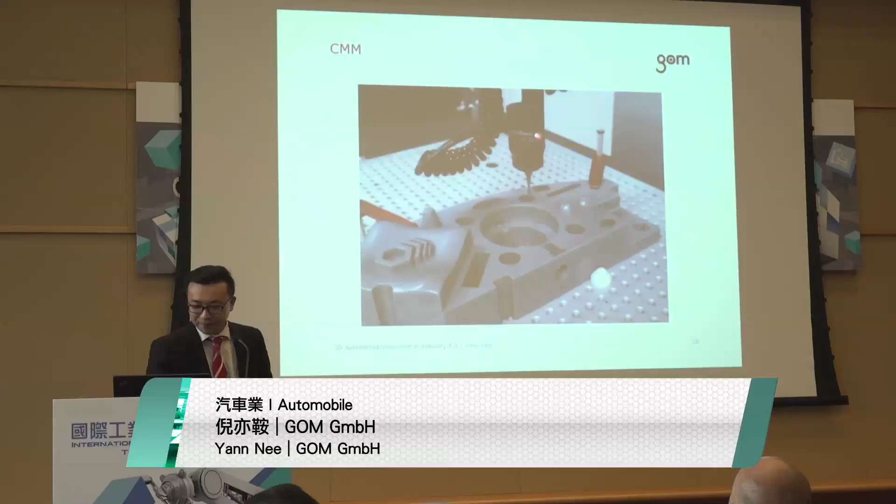Today we are going to talk more about 3D scanning, which is what our company is offering to the market. We call it the ATOS system. The ATOS system has been introduced since '95, and the speed we're talking about here is up to 16 million points per shot in 4 seconds flat.

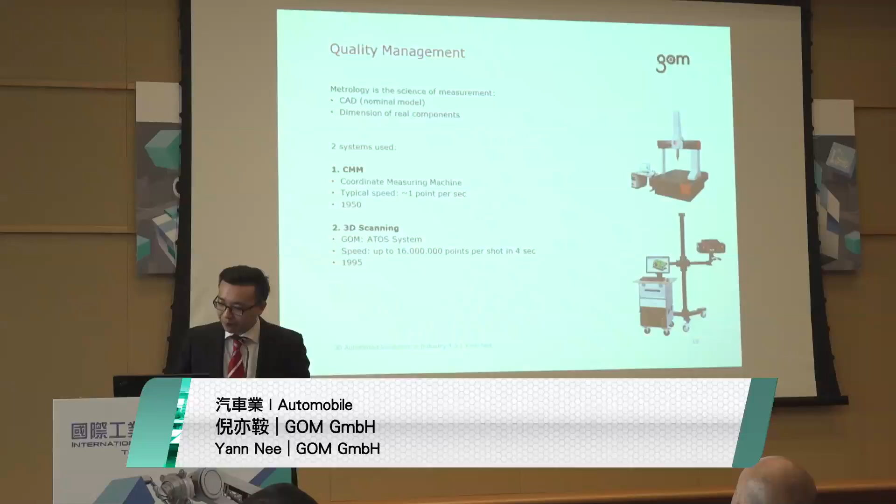Here is a short video where you can see at the design department, we talk about having a better looking car. Here you see designers taking a knife and shaping a clay model.

So after shaping that, here is one of our scanners. In the middle you have a projector, and on the left and on the right you have 2 cameras. So here you see projection of a certain pattern onto the clay model, and we record those patterns with the cameras.

Looks a little bit fancy, right?

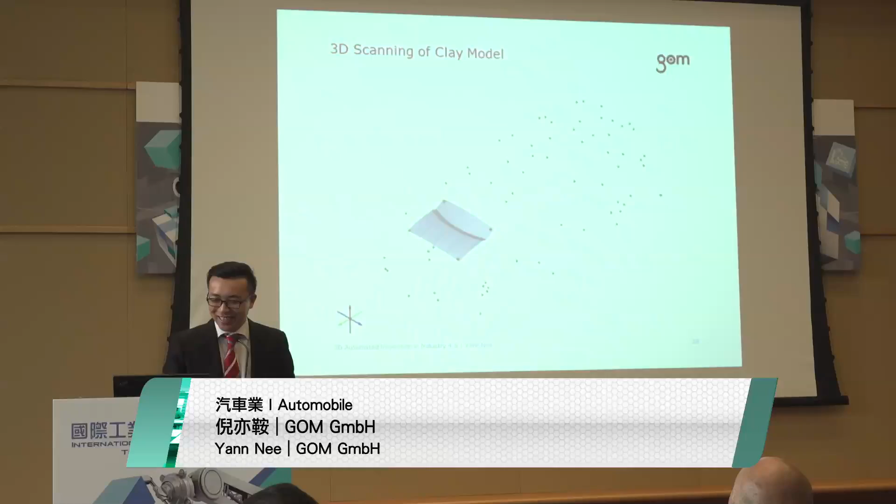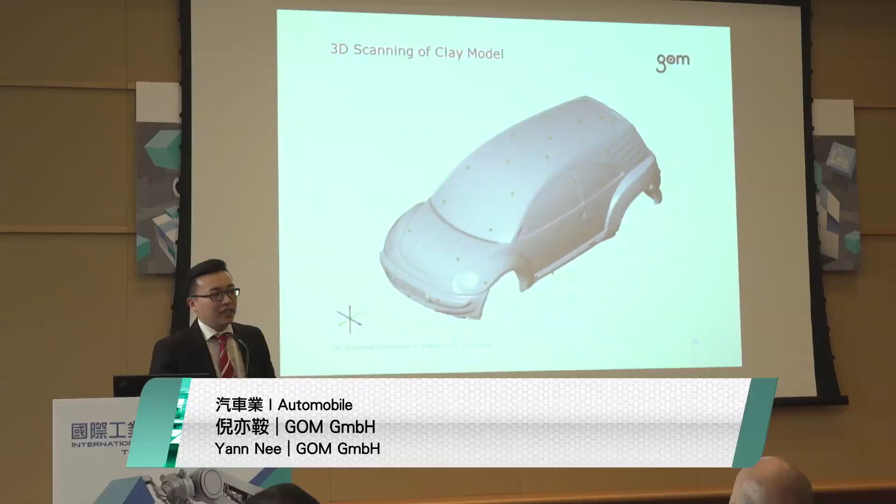So we are taking shots. Inside our software you see the real part that is digitized, and at the end you see the real part. So this is not the CAD model, this is the real part that has been fully digitized in our software.

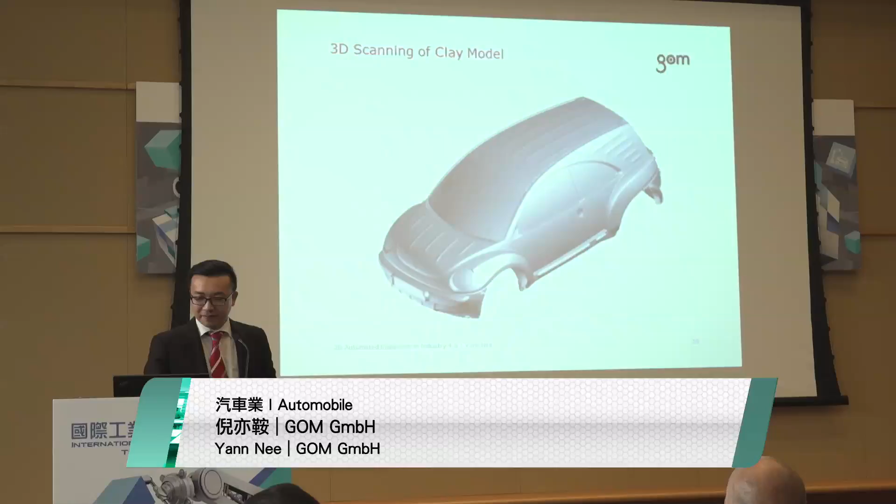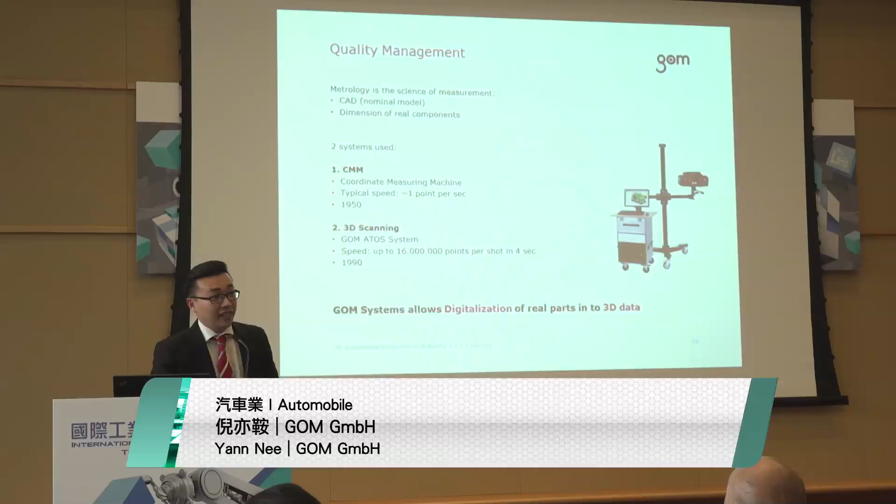So this is about digitalization. Now let's talk about big data in a smart factory, and we will put it in contrast to decentralized decision. What big data in a smart factory means is that at the top floor, you have people able to monitor thousands of parts inside the factories. A car has 1,000 parts.

You have so many cars in production, so we are talking about maybe millions of parts. Those systems will be able to optimize the sequences, optimizing the time to produce a car. At the top floor, it will be very easy to find the bottlenecks with all the software that we have. And it will be very easy to visualize and analyze problems and take immediate actions. And of course, all that data will be accessible at all times and everywhere.

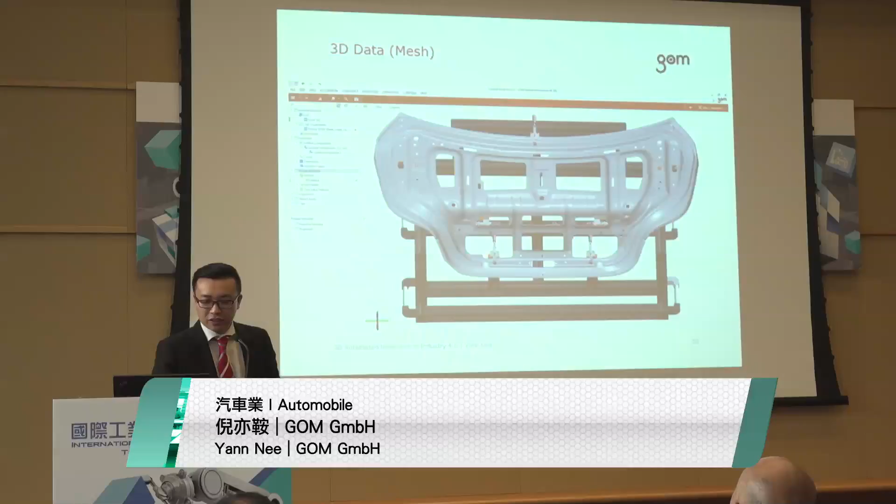So at GOM, we have just seen those 3D data. This is an example of a backdoor, a sheet metal backdoor that we have just digitized. This is the real part, and this is our nominal model, the CAD model.

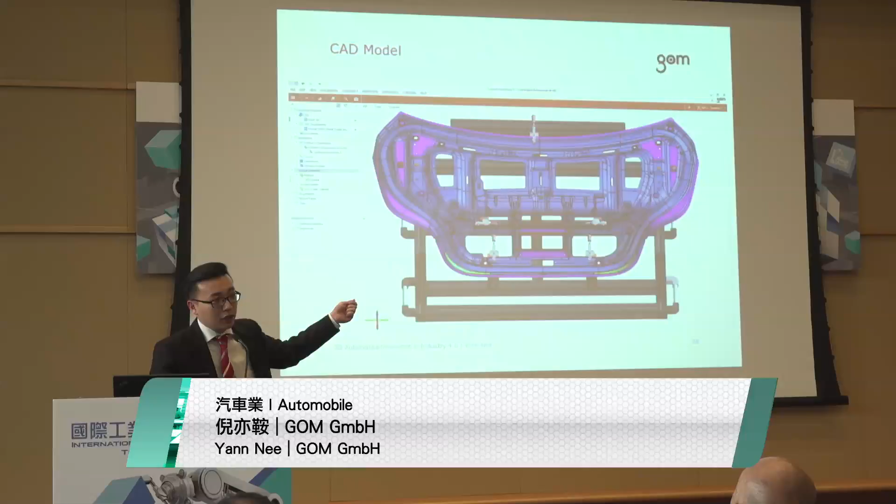With our technology, it is very easy to make analysis of the quality of the sheet metal part. You see here a lot of color, but it is very easy to understand. The green color means no deviation, so no error between your nominal data and your real part. The blue color means a negative deviation, meaning the real part is going inside towards the screen. The yellow and red colors mean a positive deviation, meaning your part is pointing towards you.

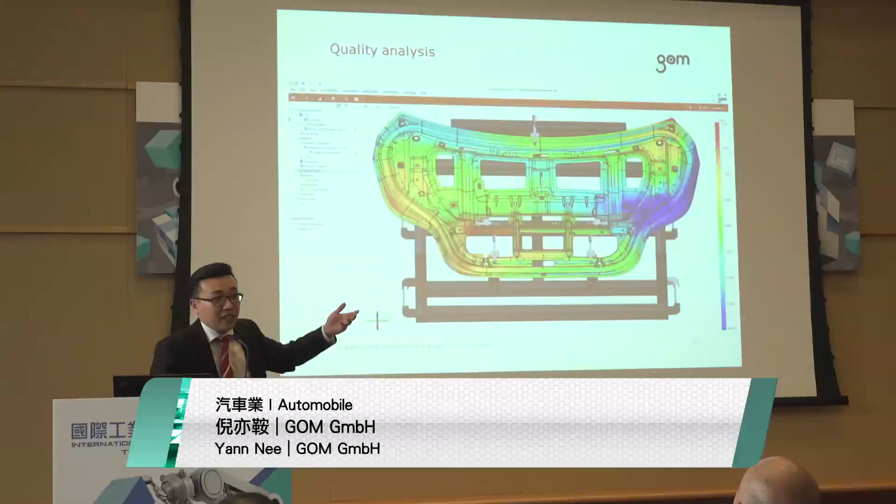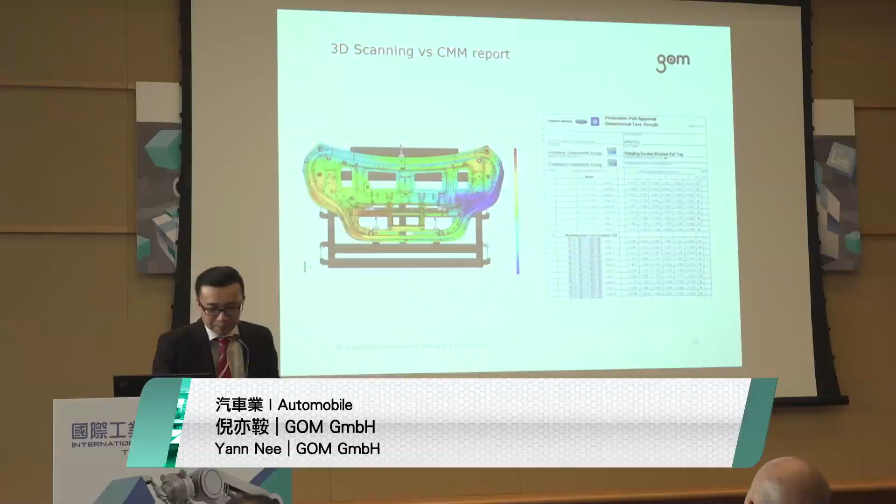I have many examples, but I just want to take one from the BMW factory, the Mini car, when they made a benchmark. As you can see, a CMM report is maybe 100 pages that can be simplified with our technology into just 2 pages.

So with our 3D data, we are allowing the top floor to monitor the trend of the quality of our car. It is possible to optimize directly critical process and to make fast visual analysis of the problem.

So this is at the top floor. Let's go down now at the shop floor, where those decisions can be made locally. Not everything has to be done on the top floor, but a lot of decisions can be made on the shop floor, so no need of human intervention.

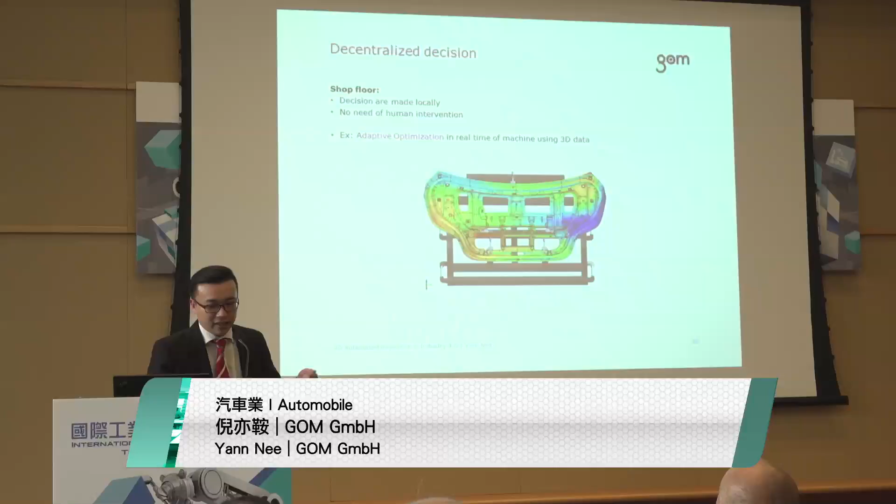And here I would like to show an example of what we call adaptive optimization, in real time by our machine using our 3D data. So with the color that you see, what we can do, for example, here I have an example of a CNC machine, a machining process where the part is machined.

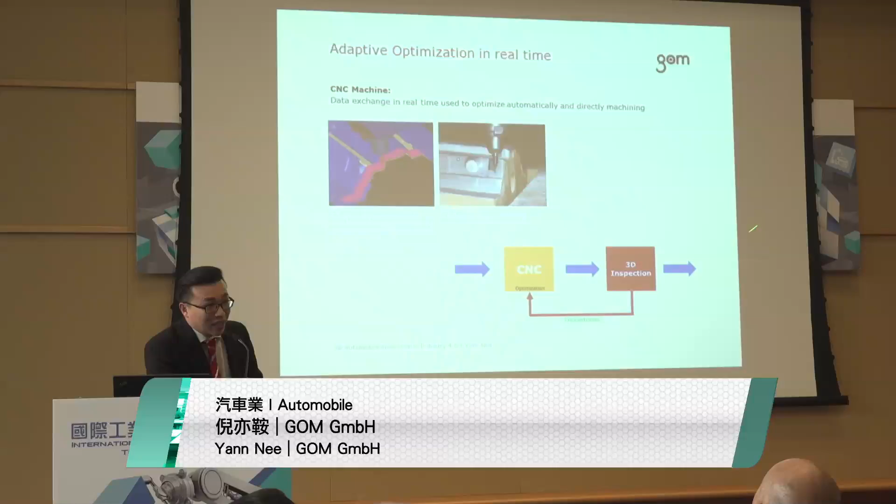And afterwards, we are going to digitize the part and make analysis of the errors. And the colors that you have seen before are just sent back to the machine. And the CNC machine, with that information, will do automatically optimization, compensation for the next part. Very nice application in the automotive industry.

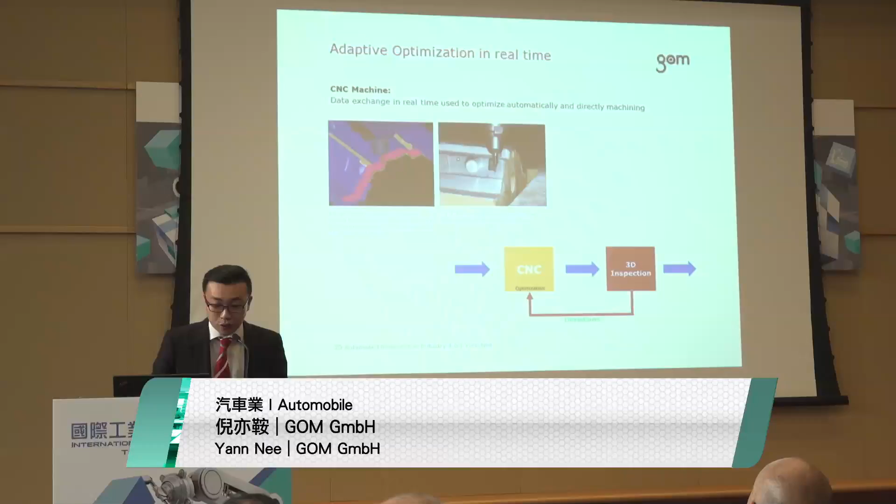Let's talk about virtualization. So what does virtualization mean? Today in our automotive factories, the time between when you first design the car and when the car is ready to be commercialized takes a lot of time - months and months and months.

So why does it take a lot of time? Because after the design, you will need to make a lot of simulation. You will need to make all the setup on the assembly line, and this takes a lot of time. As a matter of fact, in all the automotive factories, there are departments that exist, called the launch team, the pilot hall, the setup phase department. Those departments are spending a lot of time to set up all the machine.

What kind of problem do you expect? When you are really in the launch phase, you have a lot of unexpected behavior. Many things that we're doing in simulation were too simple, so when you go into reality, you are meeting even more problems. So there is a lot of tryout, a lot of optimization, and this costs a lot of money and a lot of time.

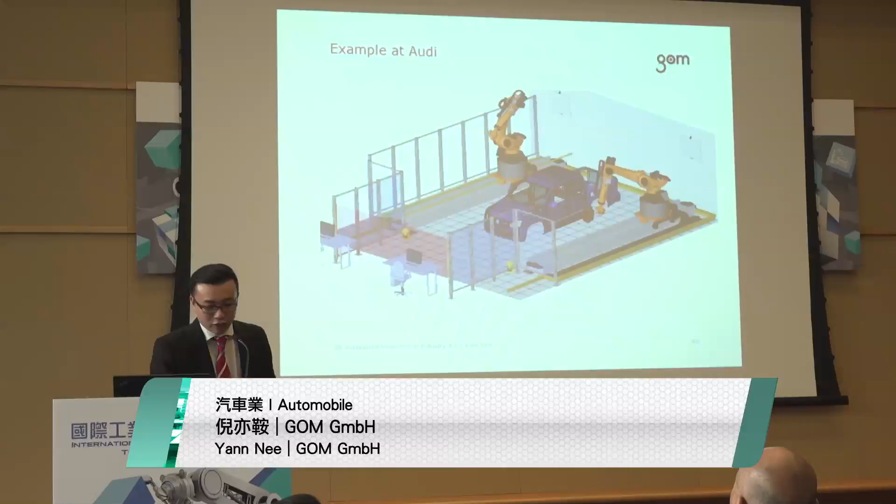The example that you have seen before at the design department has again been automated. Here is the setup that we have at Audi, virtualized, and also some very fancy installations. It's not very usual, I think it's the only installation where you can see robots put into the roof. Very, very special installation.

One thing we have learned at GOM is that making those customized projects typically took us in the past between 6 months and a year. From the idea, to the design, to the implementation, it can take up to a year. This is very long, and it was very hard for us at GOM to keep up with demand. So 5 years ago, we took a decision to standardize automation.

Instead of making customized projects, at GOM we provide a standardized product. Today it is called a Scanbox - the name is quite self-explanatory. Typically a Scanbox today takes 3 days to 2 weeks, depending on the box. So from 6 months down to a few weeks - this is a big achievement for GOM. I believe that for Industry 4.0 we have to take a similar approach, where we standardize more and more so we can accelerate the implementation of the smart factory.

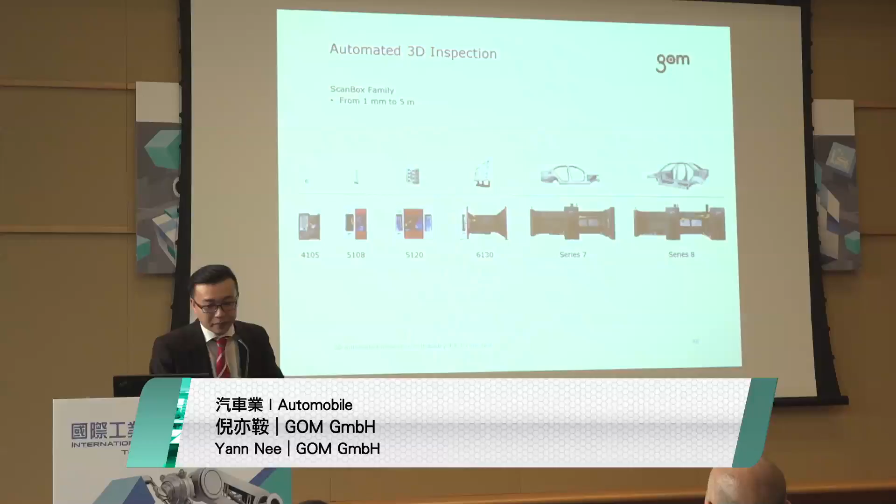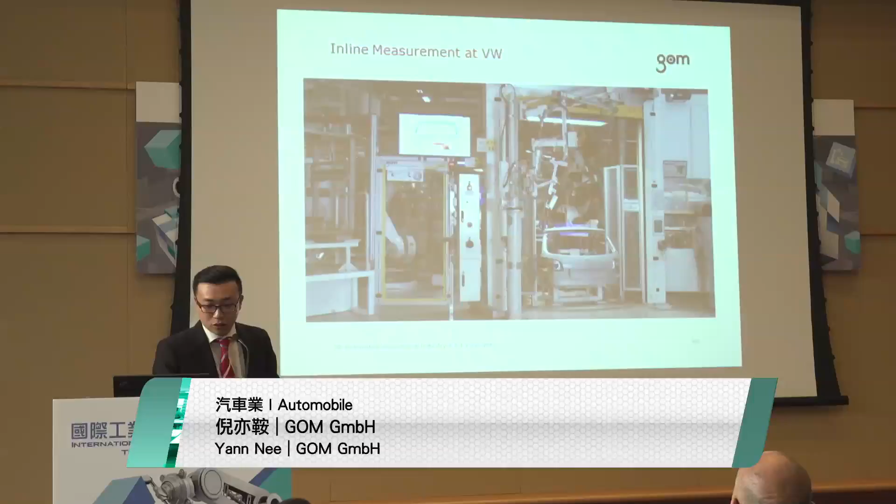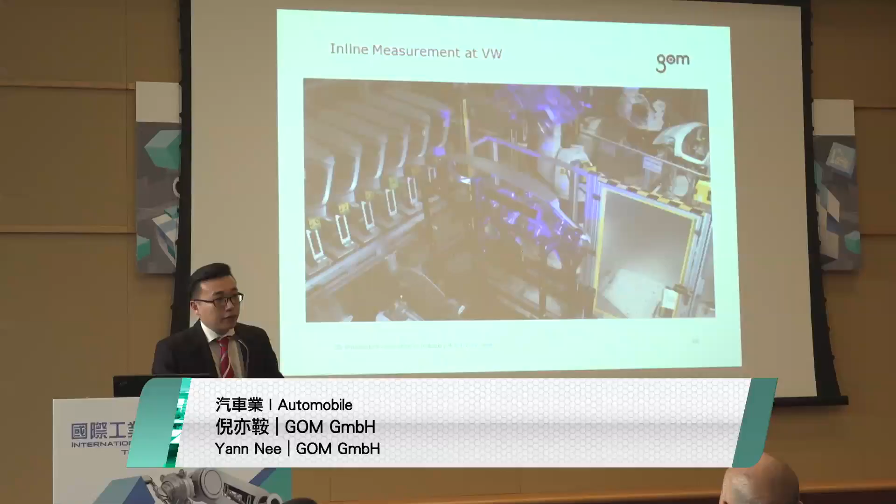I would like to show you an automation cell that we installed in Wolfsburg 3 years ago. It's an automation cell at a production line, inline as we call it, for the Golf 5. This is the 3D inspection of the 4 doors of a car, the front and back door.

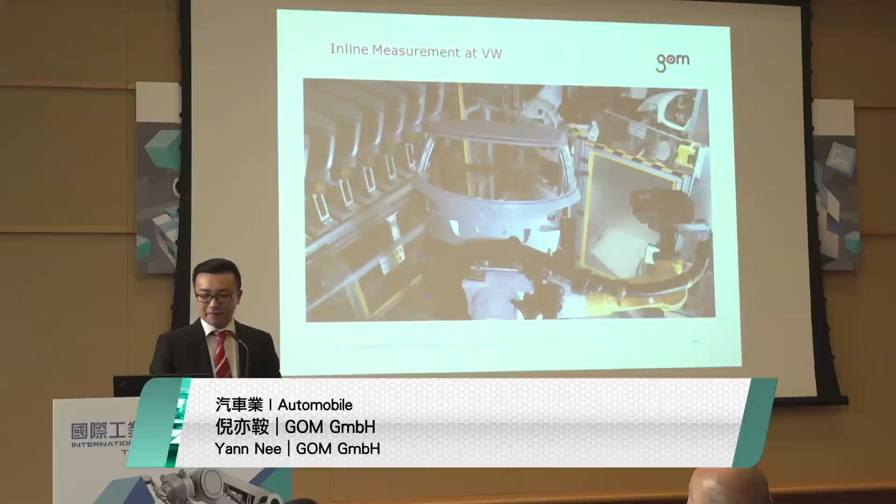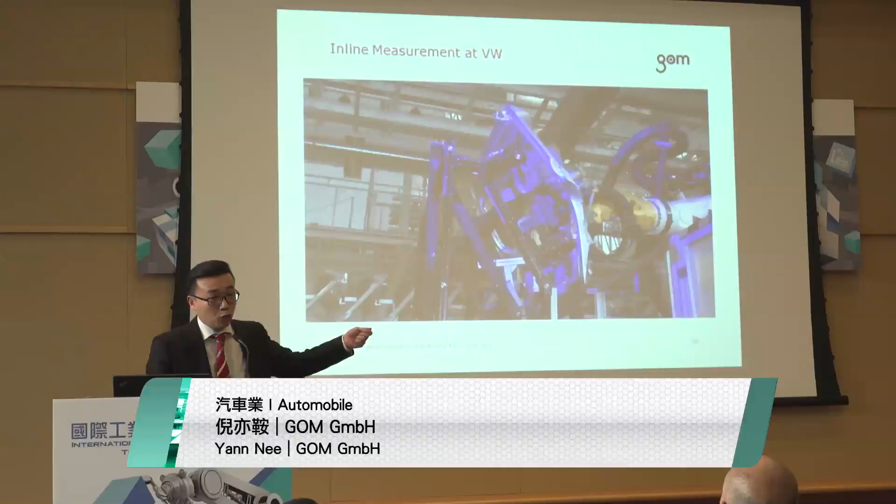As you can see on this line, you have one robot that does the pick and drop. It puts the part in place, and then our scanner automatically scans it. After scanning the part, at the shop floor you are able to see the result - if this process is stable or not, and if there is any problem, we can take immediate action.

Let's talk about customization in the automotive industry. Today, when you buy a car, you can customize the color, the interior color, and choose some options. But the smart factory can offer even more, and in the future will offer endless possibilities to customize your car so that your car is unique.

Having said that, a lot of technology and software needs to be developed. The CRM system has to find a way to optimize the sequence of the whole supply chain. If you have one customized part and everybody has the same, we need to put a barcode on each part, and all parts have to be scanned and sequenced in the right order to achieve just-in-time delivery.

In customization, a lot of you have heard about 3D printing. So what is a 3D printer? The concept is easy - it's to print what you want. Today they can print plastic parts, they can print metal parts, and in the future there will be new technology and new materials. What I see from China, we have many good Chinese brand 3D printers on the market that are quite good.

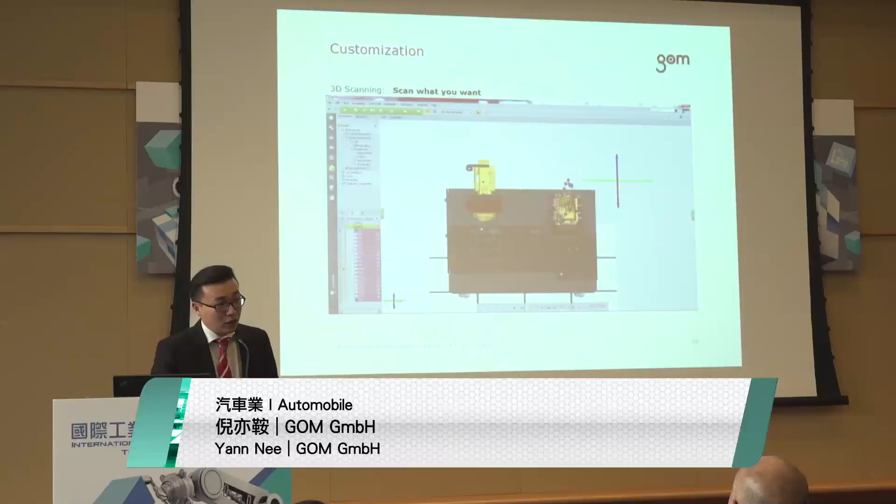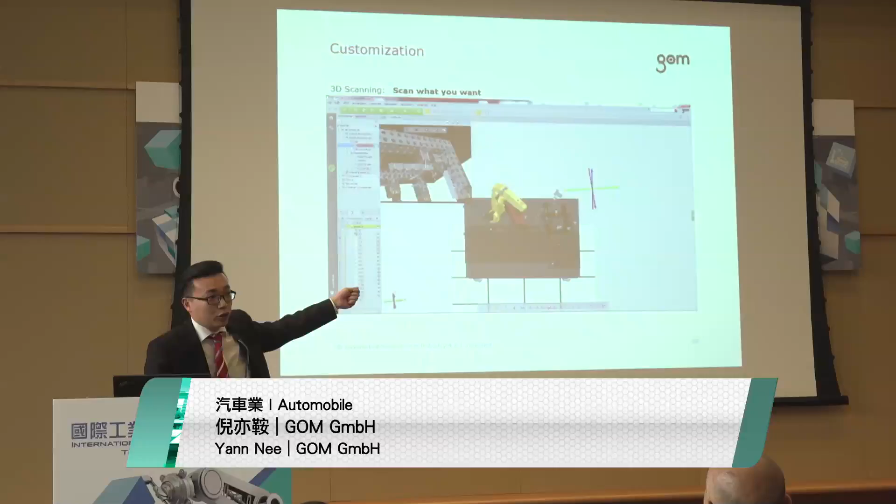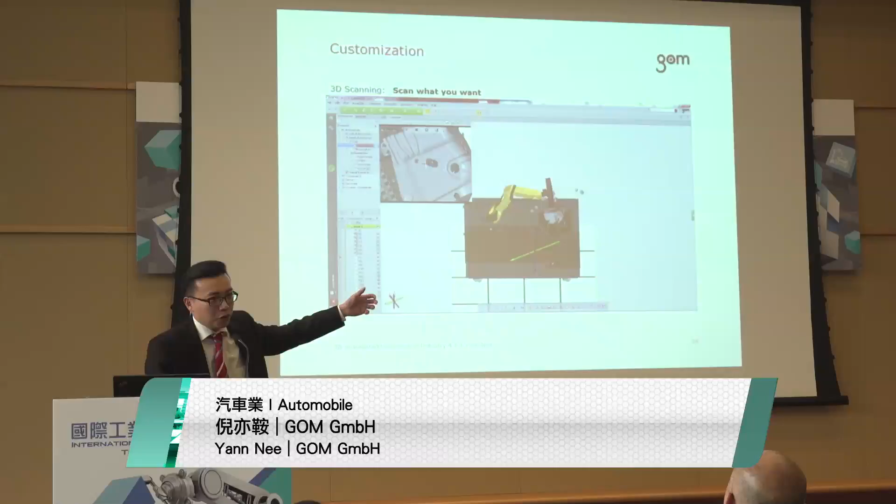At GOM, as you know, we provide 3D scanning solutions, and with our ScanBox, the mantra is to scan what you want. Here you can see a simulation of our software where you put the part you want to measure, and our program will automatically auto-teach itself to know how to scan the part. This is what we call the ScanBox. It is basically a box. You open it, put the part you want to digitize, close the box, press a button, and the part is scanned. Very easy.

But working with robots, let's not forget about a tragedy two years ago in Germany when a young man of 22 years old was killed by a robot. It wasn't a cobot, but it was during assembly. The point I'm making is that safety with robots is a serious topic, and I think we have to put a lot of effort here.

So let's talk about cobots. Cobots have two modes of operation. The first mode is known to all of you. We are just using the industrial robot that we know, that is fast and strong, but with a lot of sensors and vision systems to detect if a human is in the neighborhood. All those safety devices have to be really well installed. This is the first mode of operation.

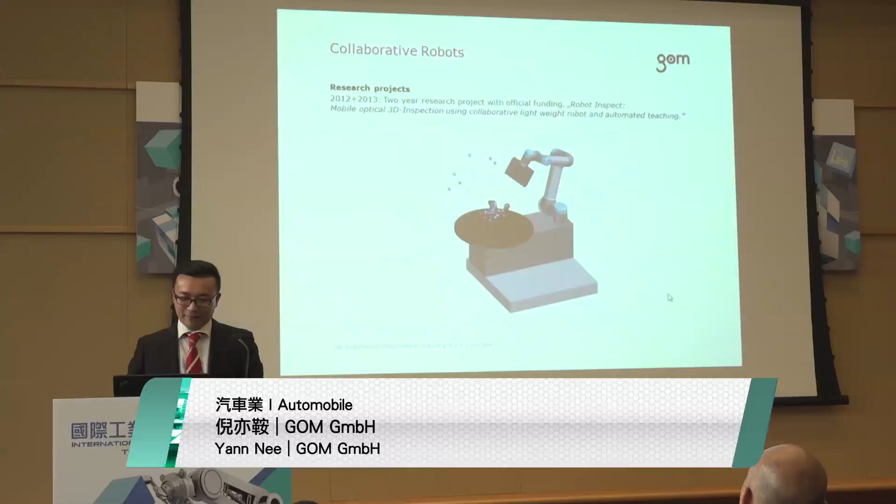Here we go. So as I said, I think cobots will bring a lot of new exciting solutions for the future. GOM is following the trend very carefully for many years already. But at this moment, we also try to integrate this technology with our solution, but we still need to wait a little bit for the right time. At the moment, this technology needs to be more mature. We need some new norms and guidelines towards safety, as I said before. This is very important. I don't want you to be in the newspaper, as we have seen before. And the speed is also at the moment a small issue, and these robots at the moment are not so cost effective, but very promising technology.

So in conclusion, we have seen six topics towards smart factories, Industry 4.0. Of course, GOM's contribution is a very small and tiny part. And I would like to end my presentation by saying the 4th industrial revolution needs the contribution of each and every one of you today. Thank you very much.